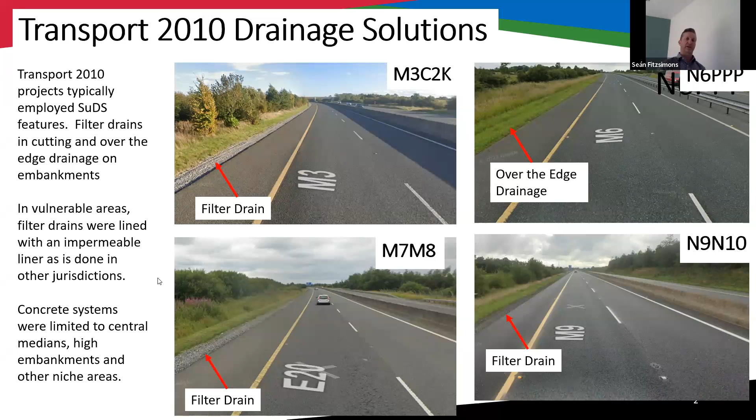Through Transport 2010, we would say that concrete systems were limited to central medians, where you had a concrete barrier, high embankments where you weren't allowed to use over the edge, so over 6 meters you used not be allowed to use over the edge drainage, and some other niche areas. That approach, by hook or by crook, has changed on recent schemes. So on recent schemes there's been a greater emphasis on the need for sealed systems. So recent schemes use concrete systems in areas deemed to be vulnerable.

So the areas deemed to be vulnerable are wetlands, so you don't want to draw down the water. That's quite correct. In wetlands, karst areas and areas with high groundwater tables, neither do you want to activate karst features if you're in a karst landscape, and you don't want to discharge directly to groundwater either. But then equally, in areas of shallow overburden where there's underlying groundwater, you may determine that you require a sealed system. And the result is that sealed systems are being prescribed basically everywhere. You might get up to 80% of areas being deemed to be vulnerable for one reason or another.

And there's no option provided for sealed nature-based drainage solutions within the TII standards. So that's, I suppose, the key message. There's no option for sealed nature-based drainage solutions. So there's no option for a lined filter drain in the TII standards. There's no option for a sealed grass surface water channel in the TII standards. And there's limited facility to use over the edge in areas that are deemed to be vulnerable.

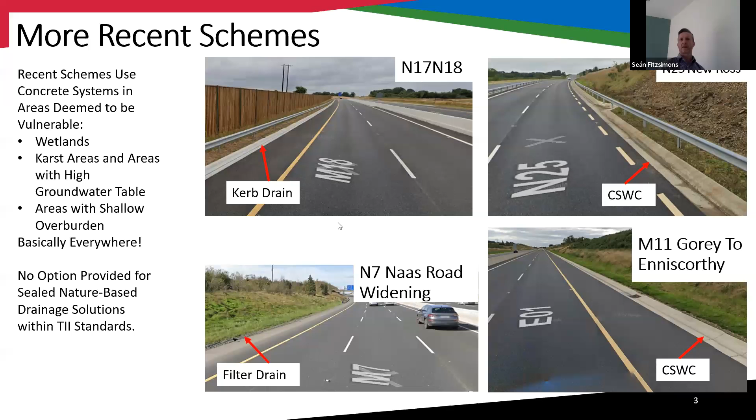And I suppose the other thing that's changed is departures. Typically, we may apply for a departure for a lined filter drain or for a grass surface water channel, and those departures are typically, I would say, refused. So I'm going to tell you a little bit about what we did on the N4 Collooney to Castlebaldwin project, which has broken the mold just slightly, and hopefully shown a way forward.

So the scheme itself was a 14.7 kilometre dual carriageway, associated side roads, one compact grade separated junction, 2 roundabouts, 12 structures, 39 culverts, 3.3 million metres cubed of earthworks, and 327,000 metres squared of pavement, so 32 hectares of pavement, most of which is new pavement. So that would give you the scale of the increase in paved area in Sligo. So obviously a very significant area of new pavement. Some of that, of course, would be associated with local roads, but even those local roads would have been widened.

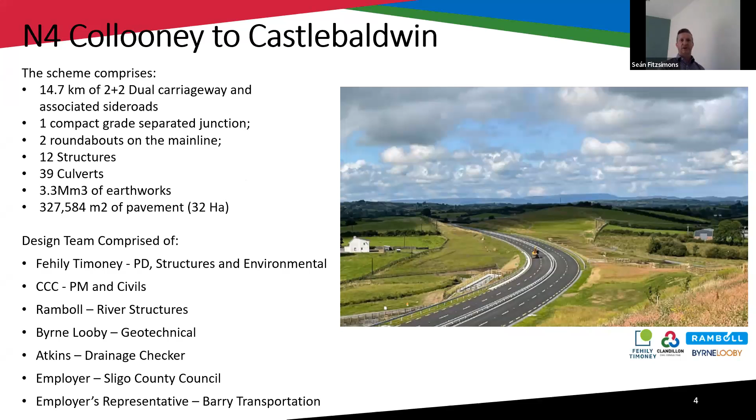The design team comprised Fehily Timoney, ourselves, CCC, Ramboll, Byrne Looby; Atkins were the drainage checker, the employer was Sligo County Council, and the employer's representative was Barry Transportation.

I suppose we came to the project with the approach of trying to maximise SUDS. So for all the environmental benefits that we know about, the water quality, water quantity, carbon footprint, and biodiversity kind of benefits associated with them, we would consider that there's a high risk from a designer's point of view associated with water quantity issues.

One of the issues that we hear back about most, following the development of a scheme of this nature, is that the water quantity or the flooding downstream is increased. It is often a complaint from landowners downstream, and you want to be in a position to address any of those queries when they do come in.

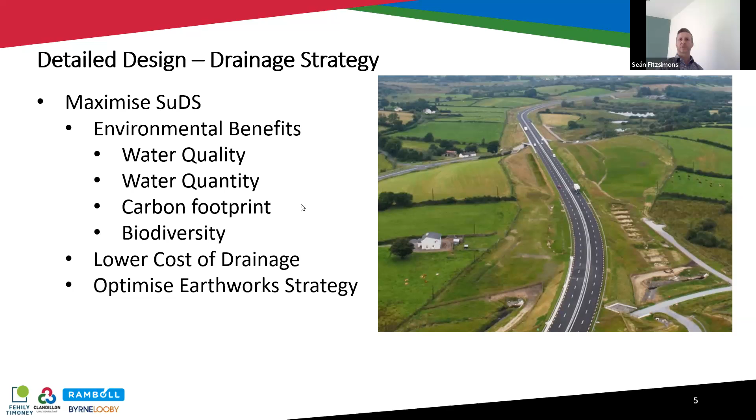It was a design and build, so we were developing the design on behalf of a contractor, and they were obviously very interested in the lower cost of the drainage associated with SUDS. The development of SUDS also facilitated the optimization of the earthwork strategy. Probably not something I'll have time to go into today.

Just go through some of the works requirements that are typical on a large D&B project of this nature. There's a few that are pro-SUDS, let's say. So you need to meet the requirements of the environmental impact statements. They'll typically refer to SUDS, or they'll certainly address runoff volume and runoff rate. And the only real way to address runoff volume is through the use of SUDS and nature-based drainage solutions.

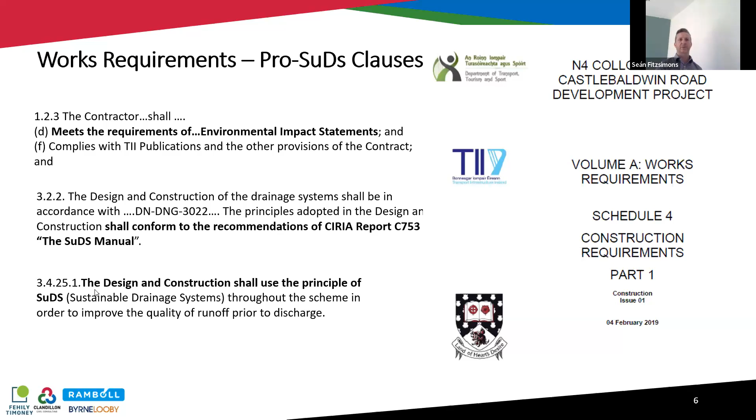The works requirements will say that you should conform to the recommendations of the SUDS manual. That's always in there. And on the N4, we had a particular requirement to use the principle of SUDS. We also had requirements to use sealed drainage systems in locations that cut into bedrock and locations that are within 3 meters of the winter groundwater table. Bear in mind when you're going through any area of peat, the winter groundwater table is at surface level, so that is everywhere where you're crossing peat.

Sealed drainage system where you're in a karstic aquifer, and I suppose you might also say where there's a risk of karstic aquifer. Also particular locations associated with environmental sensitivities, high to extreme aquifer vulnerability. So as I mentioned, we could be talking about 80% of the scheme there.

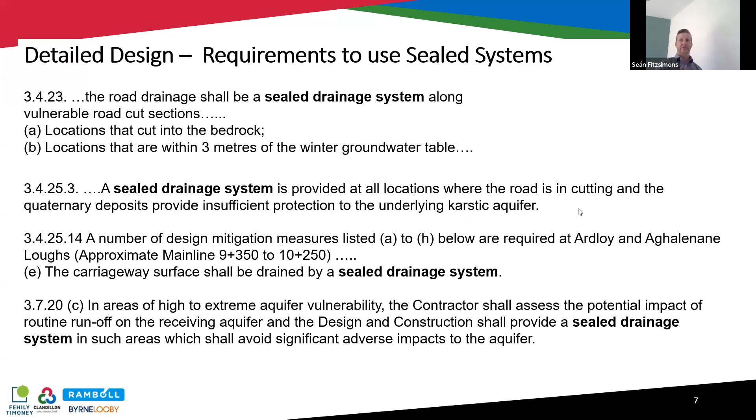There's a definition of what sealed drainage shall be in the works requirements. It should be raised curbs and gullies, combined curb and drainage blocks, linear concrete drainage channels, and lined swales to the approval of the employer's representative. We have seen that taken out of contracts previously, or we've argued for the use of swales to collect runoff at the base of embankments and that hasn't met the approval of the employer's representative. They'll allow you to discharge into a lined swale, but not outfall directly over the edge. People's interpretation of that can vary, is what I'm saying.

Crucially, within the works requirements, we're told that grass surface water channels which are lined shall not be permitted in the works. So that's a serious deterrent for designers, who would otherwise like to use grass surface water channels.

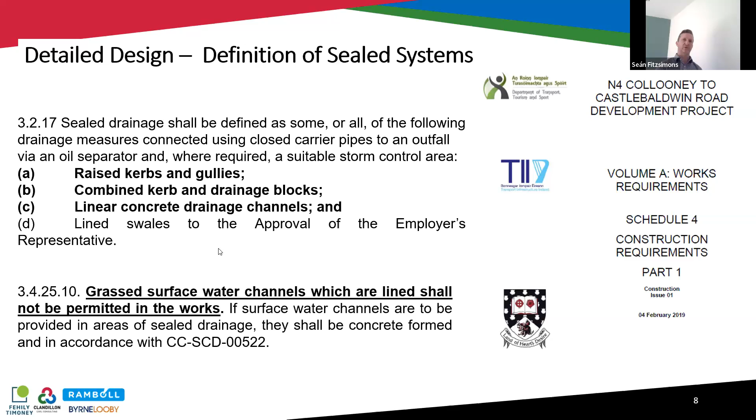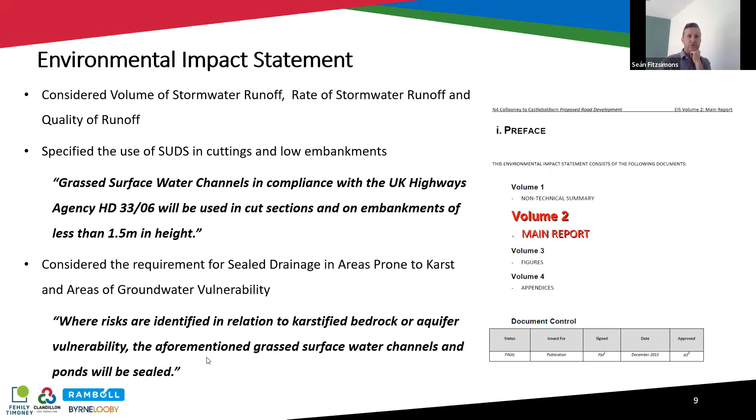What we did do on the N4 is we looked at the EIS in detail. We were obviously very keen to use nature-based drainage solutions, and we found support for that approach within the environmental impact statement, which said that grass surface water channels will be used in cut sections, and that where risks are identified related to karstified bedrock or aquifer vulnerability, the grass surface water channels will be sealed and ponds will be sealed. So we applied for a departure on that basis, noting that the requirements of the EIS are a legal requirement and basically supersede any of our contract requirements, and the departure was ultimately granted.

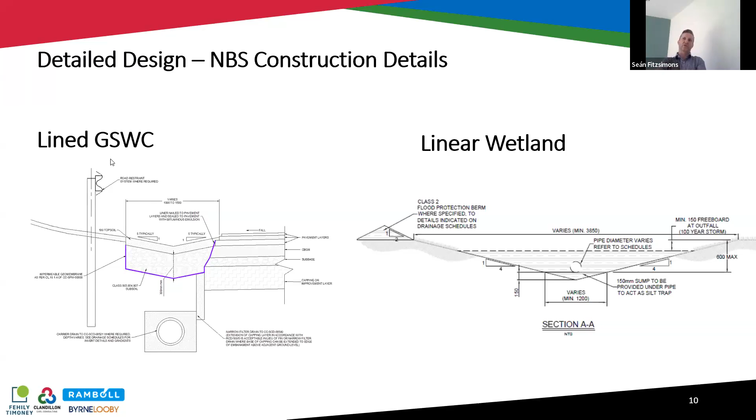There's two nature-based drainage solutions that we relied on for a lot of the drainage along the N4, particularly in the sealed areas. We used lined grass surface water channels, and we used linear wetlands. I'll tell you a little bit about each one. As I mentioned, the lined grass surface water channel was subject to a departure, and we were granted that departure based on the contents of the EIS. Obviously, we also had the contract requirements to use such systems.

Grass surface water channels and lined grass surface water channels had been used on other schemes previously. Anecdotally, we had heard that there had been a problem with their use on other schemes. While the grass surface water channels were lined, the water had come down the edge of the pavement, gotten between the liner and the pavement layers and disappeared. It couldn't be accounted for. And that's part of the reason why they were less popular than we argue they should be.

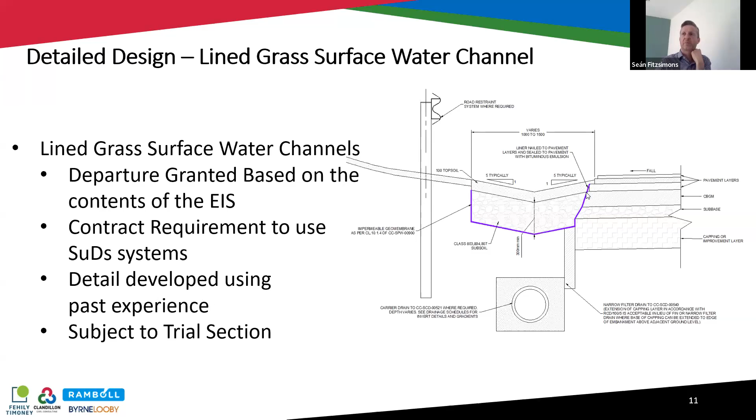So we developed this detail, and I'll go through the detail in a second, and we subjected that to a trial. So we tried a few different ways to ensure that that problem experienced on different projects didn't reoccur here. So basically, again, relatively simple solution, but we nailed the liner to the pavement.

I feel like I'm in a Father Ted episode saying we put the brick on the accelerator, but we

We nailed the liner to the pavement. And we used a bituminous emulsion to tack it to the pavement as well. So ultimately it was a relatively low-fi solution and not particularly complicated. The rest of the detail is as per the typical TII detail. The impermeable geomembrane is as per the Series 900 specification.

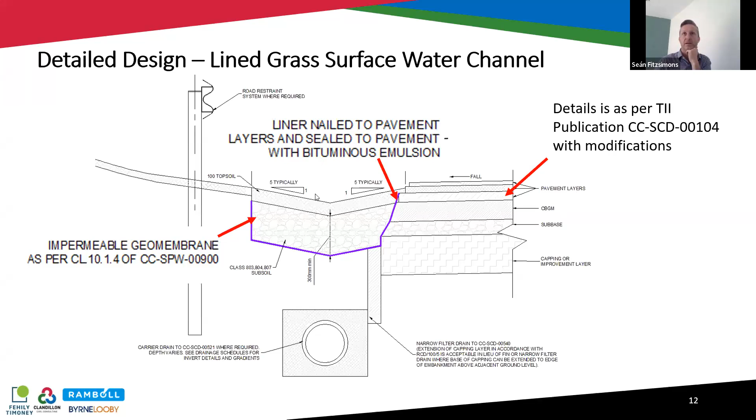And this is it being installed. So pavement installed, trench dug out, liner installed, very neat job. Backfilled with clause 804 material, which is part of the detail as called up in the drainage specification. Some debate as to whether that actually needs to be clause 804 or not, but clause 804 is what's been put in. The liner was then sealed to the pavement.

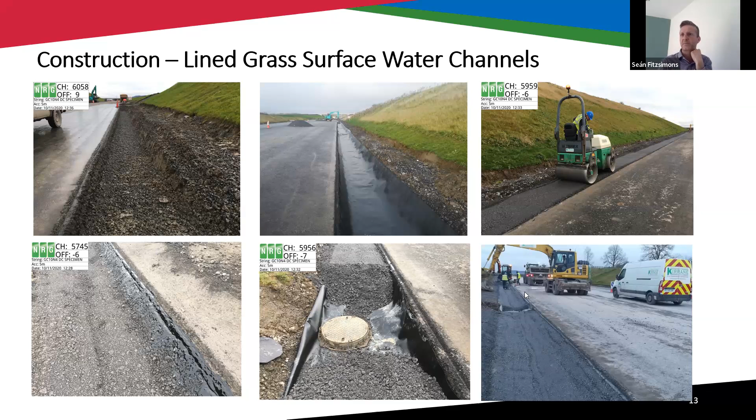Need to get the details around the chambers right as well, just to make sure that the liner is carried through the chamber and that the water has a way of draining into the chamber from the base of the liner. And obviously then the whole thing is shaped and backfilled, and what we ultimately end up with is a grass surface water channel. This is some years later, grass surface water channel adjacent to the road pavement, no curb, I should say.

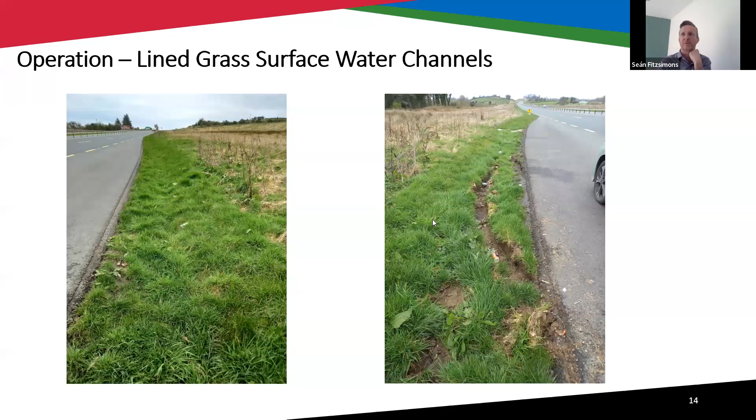We do experience some issues with the grass surface water channel. So as you can see, we're just parked in a lay-by here, and there's a vehicle that's pulled in and crossed over the grass surface water channel. There's potential that some of the liner could come away from the edge of the pavement as well. That is possibly happening there slightly, not entirely clear. But I wouldn't be particularly concerned about the liner.

If that was a concrete surface water channel rather than the grass surface water channel, still risks of some water getting through. And it's about proportional risk, I would say. If it was a concrete surface water channel, you'd have already incurred all the environmental costs associated with the production and laying of that concrete, and the operational costs associated with using concrete. All the missing benefits when you don't use nature-based drainage solutions. So proportionally, I wouldn't be concerned about some elements of the liner getting away. I do think it's worthy of further research.

Similarly here, wouldn't be overly concerned about the rutting. I expect that will fill in over time as the grass surface water channel is maintained. And obviously, with all drainage systems, some maintenance is required.

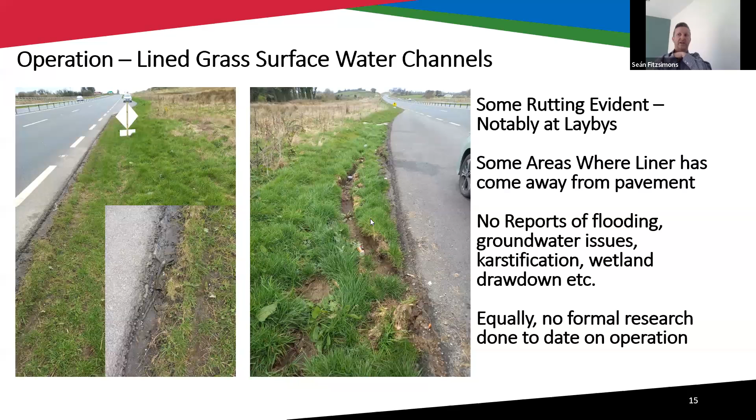Crucially, there's been no reports of flooding, groundwater issues, karstification, wetland drawdown, etc. I suppose they're the things you're trying to avoid when you use sealed systems, and there's been no reports of that. Quite unusual, actually, that I haven't heard any reports of increased water levels downstream. Normally you would get one or two reports of that with these sort of schemes, but there's been none on this scheme. I should say that there's been no formal research done to date on the operation of the grass surface water channels, so we'll come to that later.

This is the detail for the linear wetland. We've got a class 2, but the detail is based around the swale detail within the TII publications. We've made some modifications to that. We incorporated check dams to slow and attenuate the runoff. So they're quite frequent on steep ground, just to make sure that you make the most of the space available for attenuation.

We included a berm where necessary so that we could separate the surface water runoff from the road from flood waters where we're in a flood zone. And where it's not shown in the detail here, but where we were in sealed areas, we carried out testing to ensure the material was sufficiently impermeable. That was quite a crucial point, actually.

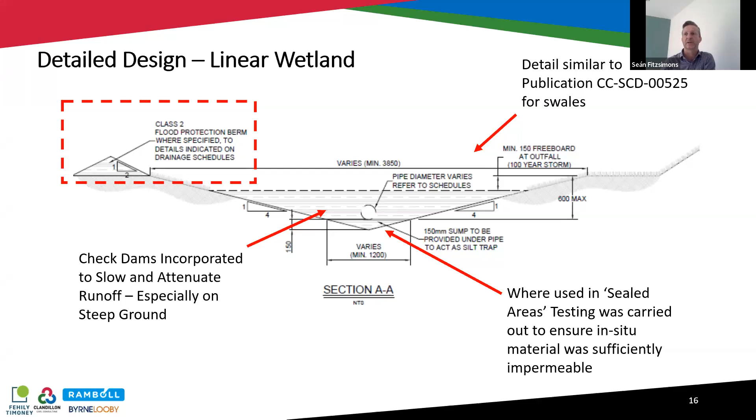There was a suggestion that we'd need to use an impermeable liner underneath the swale, and it would have meant digging out the in situ impermeable peat material underneath the swale in order to put in an impermeable geomembrane. So obviously an artificial product with a lifespan of 20 or 30 years. So we argued that we'd be much better off testing the in situ material, checking that it is impermeable, which we expected to be the case, and using that as a means of saying that the system is impermeable.

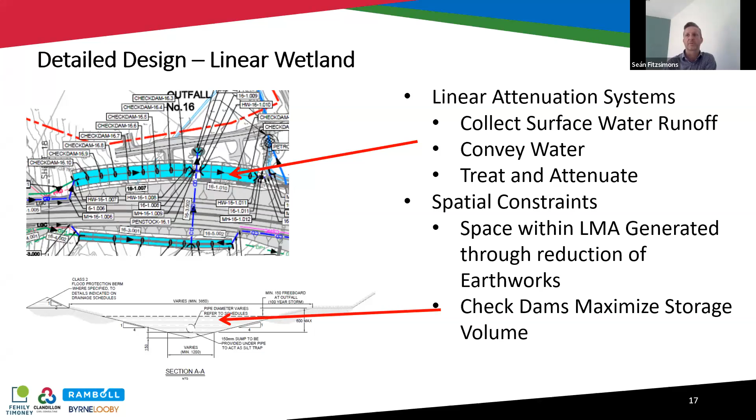So the linear attenuation systems, they collect surface water runoff, they convey the water, and they treat and attenuate. So it's an all-in-one system. We were able to navigate some spatial constraints. So obviously this wasn't there as part of the specimen or the tender design, but we were fortunate enough to be able to make some alignment modifications, reduce embankments, and generate the space for the swales and little linear wetlands where we wanted to put them in. And as I mentioned, we use check dams to maximize the storage.

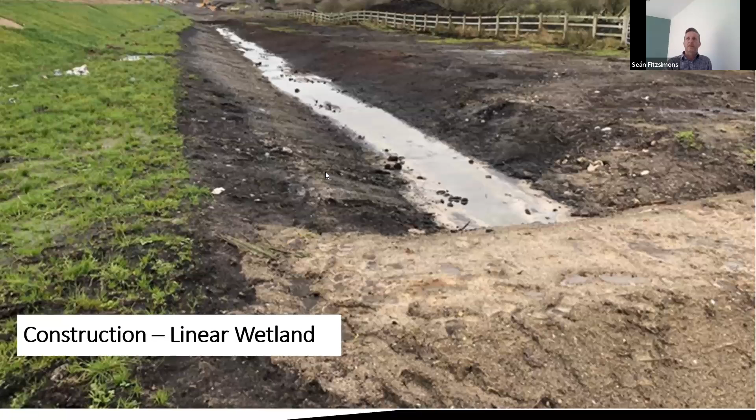So this is a picture of the wetlands being installed. A couple more of those. You can see peaty material there being installed, check dams in, and this is them in operation here. So yeah, not sure there's too much to say there.

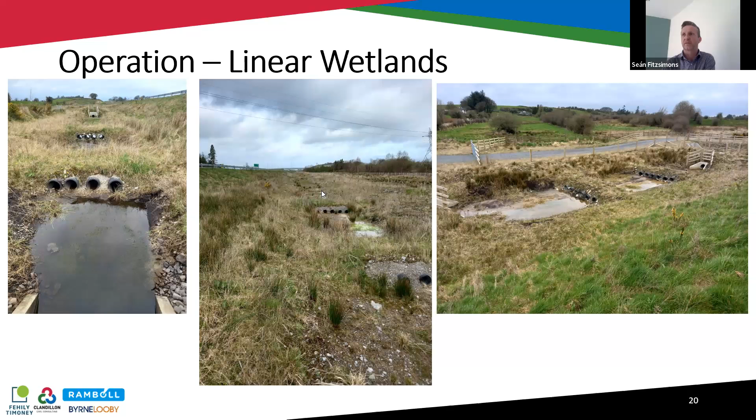I know the contractor was Roadbridge, and unfortunately they went into liquidation shortly after the road opened. These pictures were taken in April. They weren't there to follow up on some of the landscaping measures. Landscaping was completed, but through the establishment period there was nobody looking after it, so there may be some landscaping missing there.

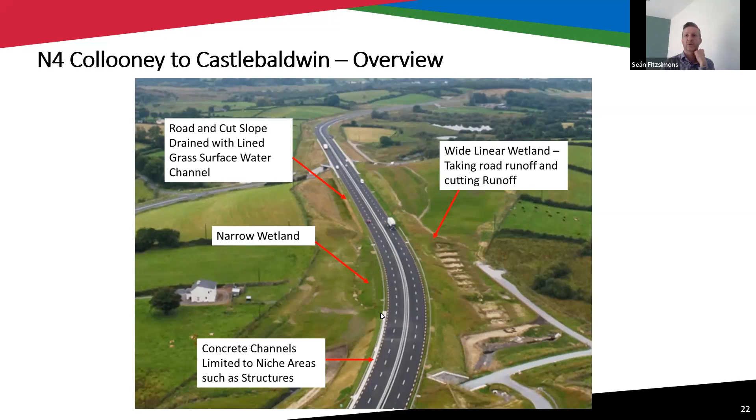We do still have some concrete channels, but they're limited to niche areas such as structures. So what's happening here is the concrete channel is crossing over the structure, and it'll outfall to a linear wetland prior to its ultimate outfall.

There are significant savings on the drainage bill associated with the adoption of the nature-based drainage solutions shown. So we got rid of close to 10 kilometres of pipe drainage and associated chambers on the main line and side roads relative to the tender design. We got rid of all of the pipe drainage on the access tracks, so 7 kilometres of that, and used over the edge drainage on access tracks instead. That resulted in the removal of 11 kilometres of concrete surface water channel and curb slot drains. So it's obviously a very significant scale. When you're dealing with a large highway project like this, the scale is large.

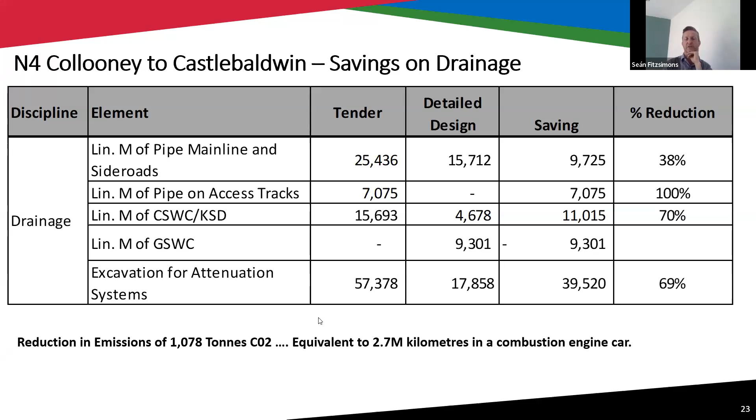And we installed just over 9 kilometres of grass surface water channel in lieu of the concrete surface water channel. The wetlands are a little bit more efficient as well in terms of volumes for attenuation, and we saved 40,000 cubic meters in excavation volume for attenuation systems, which was significant. We also did a carbon audit on the changes to the drainage design and found that we'd saved over 1,000 tons of CO2 through the implementation of these measures. So that's equivalent to about 2.7 million kilometers in a combustion engine car.

So there are some needs for research, we would say, and I have some suggested updates as well to the TII standards or works requirements to facilitate the broader use of nature-based drainage solutions. So the first thing to say is the intention of the March 2015 TII drainage standard updates was to promote SUDS, but the outcome, in conjunction with a change in strategy, and look, this is to some extent anecdotal, but I would say that rather than SUDS measures being increased, they've probably decreased. So that's something that needs to be considered, and probably researched. Like I said, what I'm saying is anecdotal, based on what I've seen around the place. But it'll be interesting to see what the statistics would show.

Is the liner used in the grass surface water channel providing adequate protection. You'd need to test underneath the liner to make sure that no contaminants are getting below the liner. I think that would be a project that's worth doing.

But B, I think it would be interesting to see if the liner is in fact necessary, or if all the contaminants are being trapped in the upper layers of the grass surface water channel. And it would be interesting to test a grass surface water channel that doesn't have a liner, to see if there's any contaminants making it 600 mils down from the surface of the grass surface water channel.

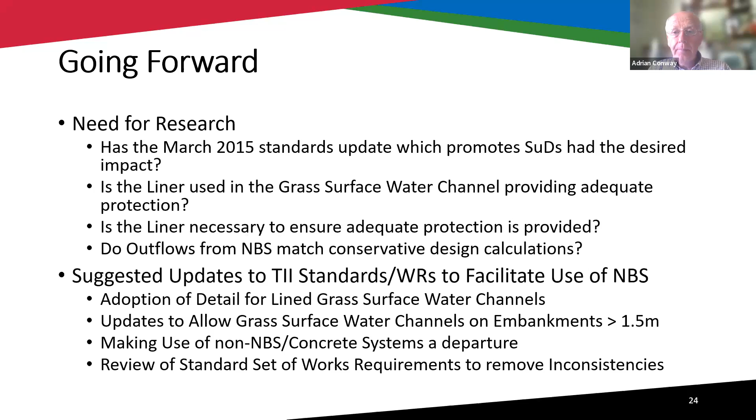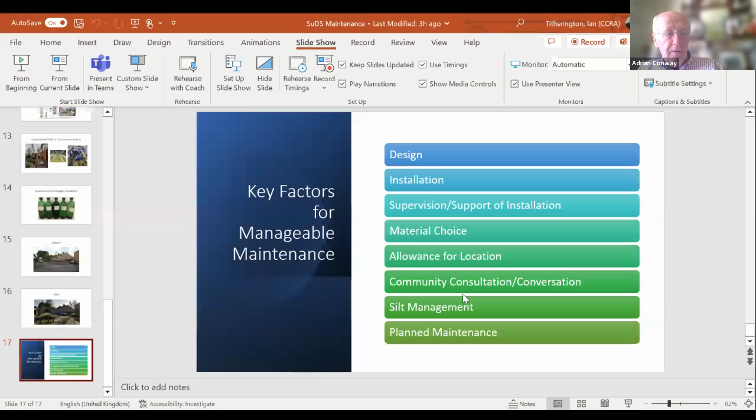Thanks very much, Seán. Our next speaker is Ian Titherington, who will speak on maintenance consideration of the Cardiff experience. After a short spell as a student engineer in the former Neath Borough Council, Ian was a civil engineer in Cardiff Council for over 32 years, specialising in all forms of drainage design, rehabilitation and maintenance, along with other areas of municipal engineering, including waste management. For the last 10 years in that post, he concentrated on drainage elements, new development, specifically SUDs and the development of retrofit SUDs. This included devising, along with Jeremy Jones, now at Atkins, and leading on the Greener Grangetown project, after which he was made UK SUDs champion.

He was a SAB officer with the SUDs Approval Board in Cardiff for the first four years of the Welsh statutory SUDs legislation, helping to deliver statutory SUDs for the capital. He's also currently invited onto advisory groups from CIWEM to the Institution of Civil Engineers, helping to inform on flood risk and all things related to SUDs. His new role is a senior advisor on sustainable drainage for the Welsh government. So without further ado, hand over to you, Ian.

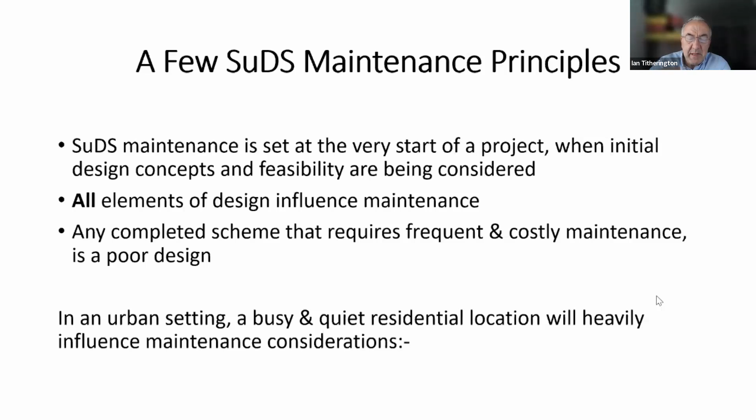If you're in there a lot maintaining, I think we all know it won't be maintained. It has to be designed for infrequent maintenance, easy access. It's very, very important, and that's considered from the very start. In an urban setting, a busy or quiet residential location will heavily influence maintenance considerations. I'll start through the schemes and I'll talk through what I mean.

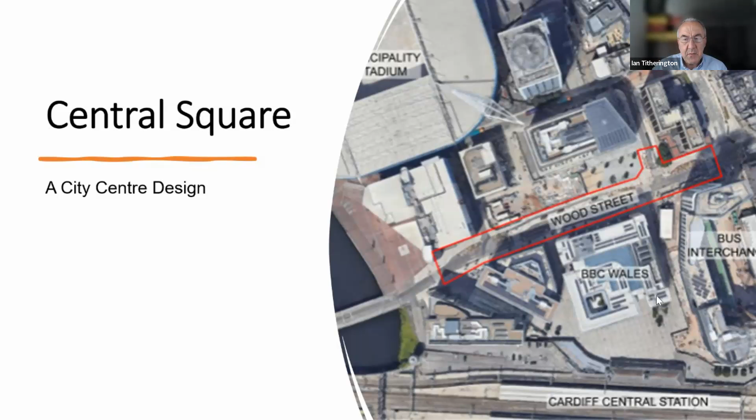The first one is called Central Square in Wood Street in city centre Cardiff. This is about as central as you get in terms of Welsh urban identity. It's near the stadium. It's near the new BBC studios. It's by the river. It's an old part of the city full of services, hugely challenging, next to where the new bus interchange is going to be placed.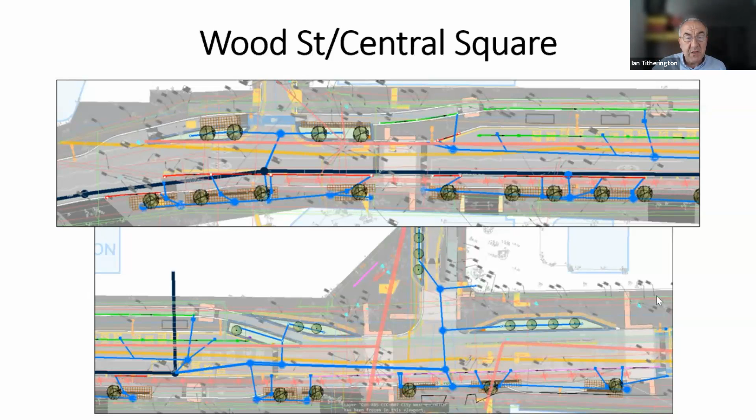You have to design so people don't walk over them. You have to think about maintenance of the vegetation, maintenance of the trees, trip hazards. All these elements are brought in from the very start in terms of maintenance. All the trees that are chosen are low leaf fall, low fruit fall, which can be problematic for cars. So all these things are thought about in terms of maintenance, including the vegetation. One of my colleagues, Isla, will be talking about vegetation later in the presentation.

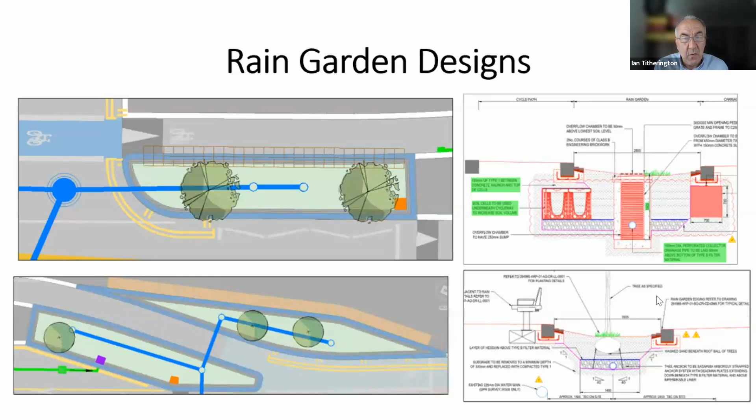Again, a little bit more detail about the rain gardens, how they're designed in terms of allowing for footfall, cycling, as well as traffic. Talking very closely with highways colleagues about curves on the corners in terms of bus access and wheelbases on buses. This scheme actually had to be changed halfway through because they bought a new fleet of buses and they didn't go around the corner very well. So all these things come into account, and access for maintenance.

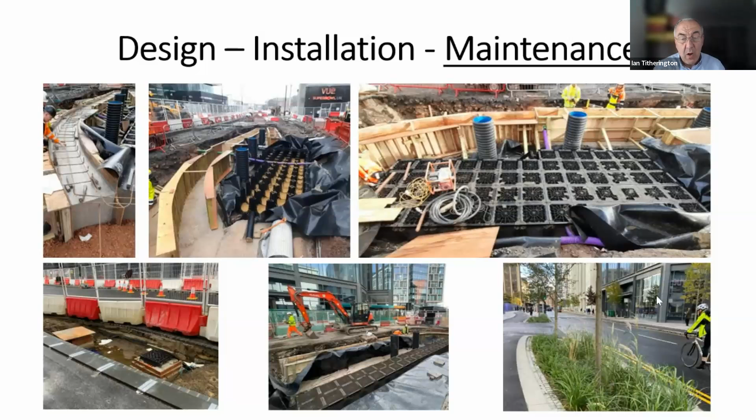That's probably the single biggest challenge. What we've done in this particular site, we've made the areas as wide as possible to deal with the silt, and the vegetation will break down a lot of the silt, but the plan is to probably scrape and remove the silt every 6 months on the edge of the rain garden because the loading is so heavy in a busy highway.

The second example is Greener Grangetown. This was a scheme completed about 5 years ago, a residential scheme, retrofit scheme, a combination partnership between Cardiff Council, Dŵr Cymru Welsh Water and Natural Resources Wales. This is a plan showing the scheme and a few key facts.

12 streets, moving about 42,000 square meters of runoff from the combined network and using grass and gravity to put it in the river. Over 107, I think 108 rain gardens, through 4 new outfalls, including all the elements associated with rain gardens, because we tried to do the street renewal at the same time.

This scheme, in terms of consultation, that was very, very significant. When you're doing retrofit in a residential area where you've got businesses, that conversation rather than consultation is important. And the reason why it's important for maintenance is you get locals involved. If you get locals feeling an element of trust with what you're trying to do, they feel they've been listened to in terms of design, because this is the street that they live in and they work in, it's personal to them. You involve them, they feel a personal link with these things and they look after them.

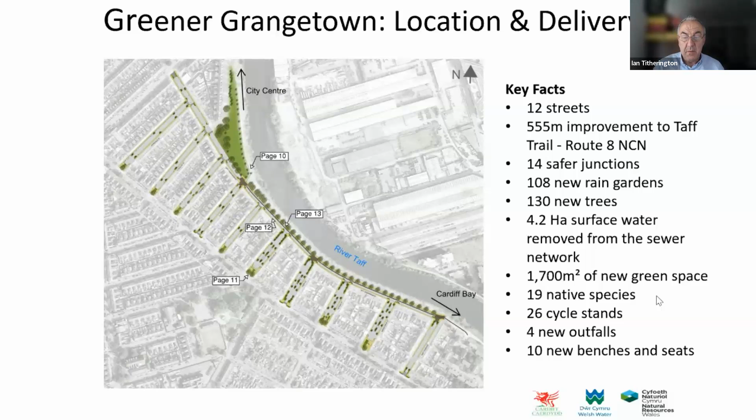That means maintenance. So design challenges: parking, obviously, existing trees. Unlike Plymouth, we try not to chop down the trees we've got. We're trying to add to the canopy we've got in Cardiff, like many cities are doing now. So working around those existing trees with designs is important. Cycle routes, very, very important in terms of access for maintenance. You've got to think about the vehicles in terms of accessing for maintenance, street lighting, signage, access, maintenance.

Maintenance isn't just about the SuDS features, it's maintaining things that are already in the streetscape. You've got to work with highways colleagues on telematics, on lighting, on signage, with your parks colleagues on managing green open space and existing trees. All these elements come into maintenance when you're doing SuDS and retrofit SuDS.

I mentioned earlier about consultation, conversation, community action. This is a classic example of Greener Grangetown, where we had public meetings, we had street surgeries in the open air, we invited families along, we used the schools for conversations with the parents. It's really, really important. I can't overstate, if you're serious about communities taking pride in where they live and looking after what they have, with really, really tight council funding, the consultation enables you to get the locals involved, and they really take pride in what they do.

And this is a typical poster we used. We gave people options in terms of designs. Very, very important again to say, you said, we did. This particular street changed designs on 6 occasions because the locals honed it down to what they wanted. We gave choice about trees, about shrubbery, what they looked like at different times of year in terms of seasonal colouring. We really went down to that level.

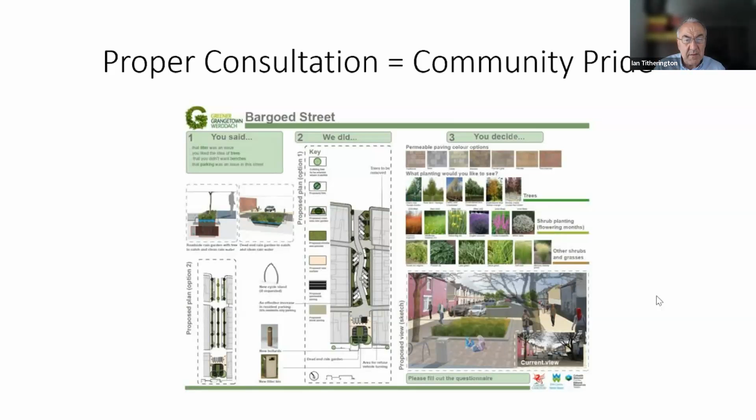They really felt involved. They felt part of the scheme. So they take a lot of pride. Most of the litter picking in these areas is done by locals, not by the council. They volunteer. They do it to take pride in it. They do weeding. They look after things, and that is an essential element of delivering the scheme.

Again, this is an example of it. On certain weekends, we involve local families to do planting. We supply the PPE, and the kids and the parents could get in and dig. And the one on the right is a good example of a local primary school planting a rain garden, and that's what it looked like after 12 months. So these elements are very, very important in terms of consultation, particularly when you retrofit in an existing community.

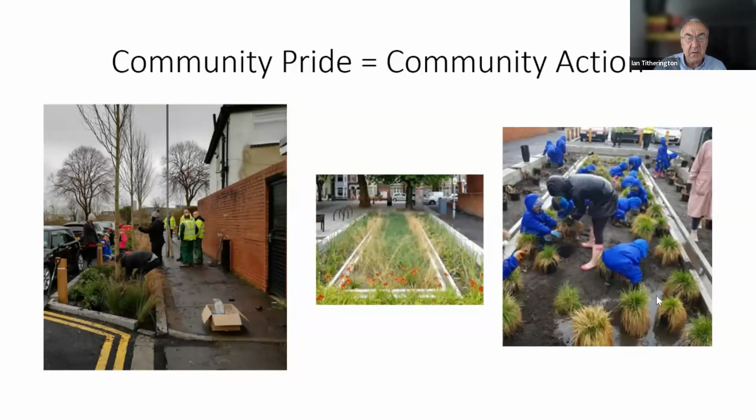But basically, these systems, we went into COVID, they hadn't been touched for 3 years. They work perfectly because they've been designed to work perfectly. The soil is engineered to the right level. The plants are chosen. The trees are chosen. The system works. It's self-cleansing velocity. The maintenance is less because the design is right for the location and the installation is right. Two key factors. I'll finish on this.

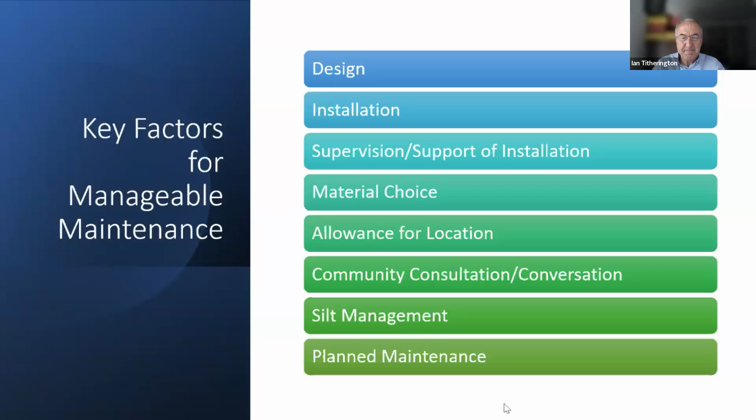Thanks very much, Seán. And our next speaker is Isla Jackson, who will speak on plants and landscaping: what, where, and when. Isla is the Director of Civic Engineers and leads the Scottish Studios. She's passionate about building and the spaces in between the buildings. As a chartered engineer, she aims to create inspirational structures and places that have a positive impact on the environment and enable people to lead happier and healthier lives.

Skills Isla has developed, coupled with the active role engineers are playing in addressing the climate emergency, have found her looking at 5 key principles when designing projects: exploring, not exploiting; building, not destroying; reusing, not just using; listening and learning; and climate resilience. Her work includes leading on all structural, civil and transport engineering projects for the practice in Scotland and Ireland, which includes Block A of the transformative Glasgow Avenue.

A selection of other projects she has been involved in are Glasgow Woodside Making Places, Edinburgh North Grove, Inverness Heritage Trail, and South Dublin District Centres. Isla is also an approved certifier of design for building structures, and a trained principal designer under CDM 2015. So Isla, over to you.

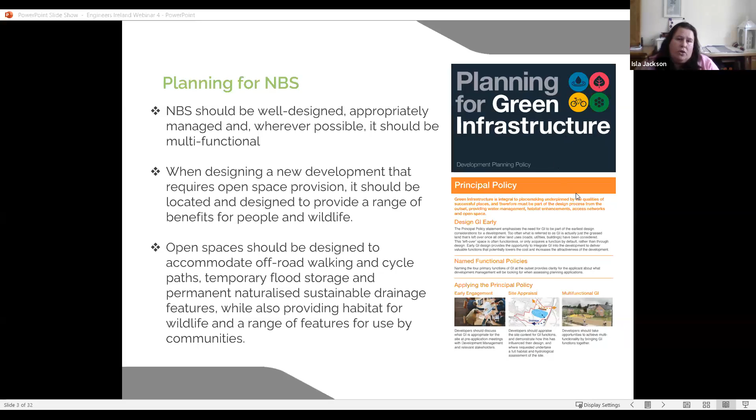Stewardship of NBS, so basically how do we manage it? The success of rain gardens is absolutely critical, and particularly in the first 3 years of their development. If they start looking a bit scrappy and not very attractive, people will start to lose faith that they're doing what they need to do.

So it's really important that we get that maintenance correct, and that people are bought into it, as Ian was saying, whether that's the community, the council, or the developer who's funding that. It almost always will come down to where that funding has come from, and a proper planned approach in the early stages of design is absolutely critical.

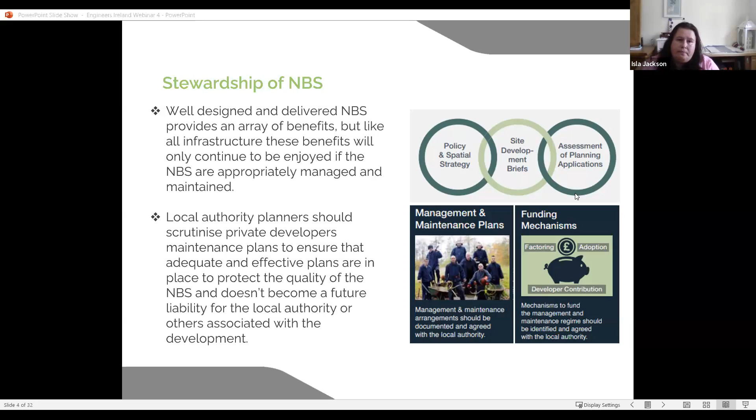Just a few slides on things that are happening in Scotland, which is where I'm based. So Edinburgh's got some quite nice documents in terms of water management, and they've broken it down into regional, citywide policy projects, influential studies and projects. I suppose it's good to note that this is quite a fast-moving science. There are different projects being put on the ground all the time.

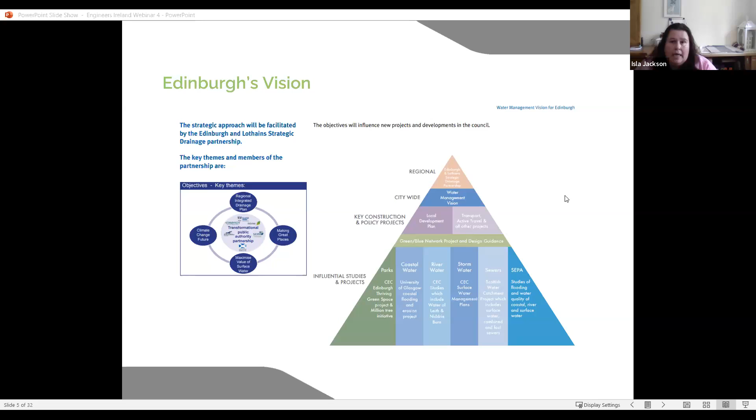It's not particularly frequent at the moment, even in Scotland or Wales or England. It is quite difficult to convince councils to put in nature-based solutions, despite all the policies pointing towards them. So again, it's understanding what the policy is, and mirroring that back to colleagues in councils, to remind them that this is something that needs to be dealt with, and dealt with quickly, given the climate emergency we find ourselves in.

The MGSDP, which I always get a bit mixed up with, is the Metropolitan Glasgow Strategic Drainage Partnership, and they're responsible for looking across the Glasgow region on different types of sustainable drainage or nature-based solutions. So there's different things across each city, and that'll be very similar in Ireland. There's some nice documents that have been produced.

The Irish Green Building Council has quite a nice one that I found online: Biodiversity in the Built Environment. Again, that supports what we're trying to achieve here. A quick Google search will give you some of the backup that you need, and some really interesting facts and figures, which are always useful in the early stages of design, when trying to convince people that this is the right thing to do and we do need to adopt this approach.

Just in terms of a case study, this is the Grey to Green in Sheffield, which was one of the very first really quite major ones that was put in. You can see there that it was on a slight hill. Rain gardens have been installed, and it's been a hugely successful project. The planting is really successful, and it's been widely accepted as being a really successful project.

There have been lessons learned out of Sheffield in terms of the soil makeup, composition, and so on. So again, we're learning as we go, and every project that goes into the ground is an opportunity to learn from that and do better for the next one.

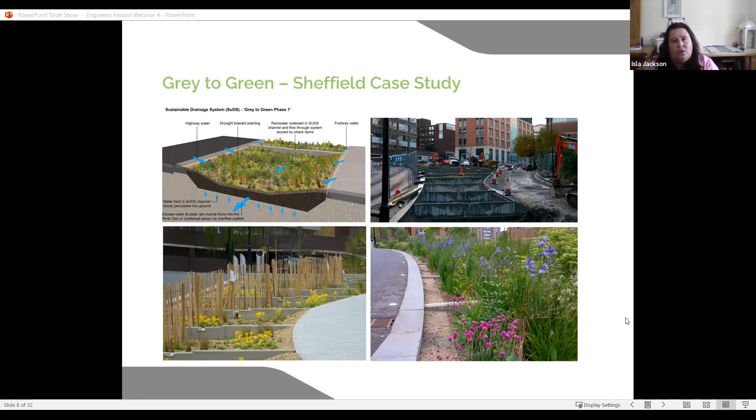So again, it's that sort of education and engagement with people to help them understand what we're trying to do. In terms of the soil that was used in Sheffield, this was quite an early approach, and again, as Ian had said, the British standards sort of promote this green roof type soil.

We've kind of moved away from that, and we're working with academic partners to try and address what is the best type of soil, and that can be quite localised depending on your area. Again, we'll touch on a case study that we're doing in Cork, which is close to the sea as well, which can impact on the selection. But basically, it's to be aggregate stone if we can get that. And what they went with was a 70-20-10 split.

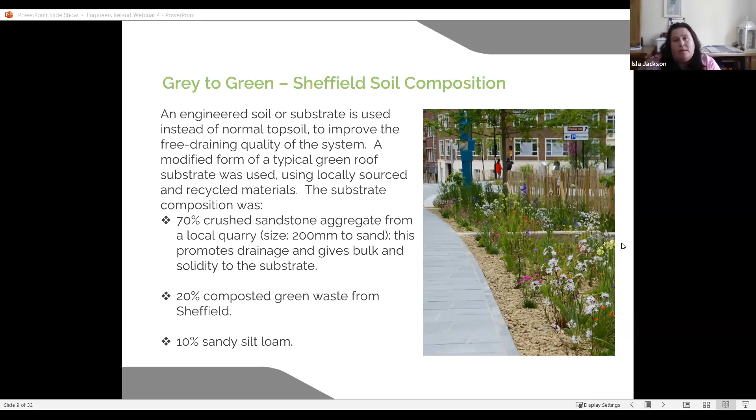And as I say, that is something that we are looking at across the piece. So it's something that you can work, as I say, with different academic partners or through demonstrator or pilot projects to get the right mix to suit your area.

Just in terms of risk-based approach, quite often we can get a bit of pushback in terms of level changes, particularly adjacent to footpaths. And really it's about discussing that with your council colleagues right from the very start. The best ones look like they don't have barriers all over the place, but again it can depend on what the sort of policy is in your area. So early engagement is absolutely critical to get your detailing right, because if these things start coming up towards the end of a project, it can really start to delay things, and it delays things going on site.

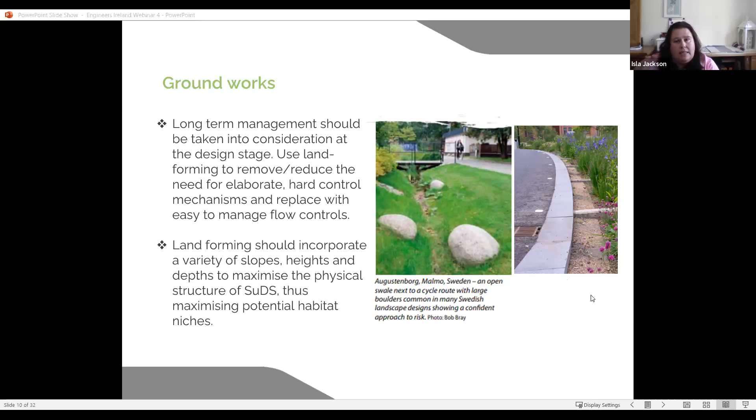In terms of the Sheffield project, they worked with a sort of community organisation, if you will, called Green Estate, which was a really interesting way of doing it. Amey were responsible for the maintenance generally, but they worked with Green Estate in the early days of the Sheffield project, and that worked exceptionally well because they basically worked with the community and they created jobs. They were a local community organisation, and they helped to maintain these rain gardens, as I say, in the early days, which helped them really establish, and it's testament to the successful outcome.

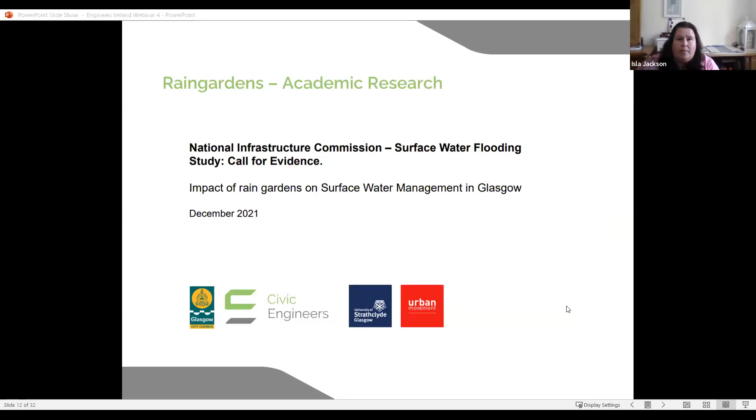We've done some academic research, as I mentioned. This was something that was done with Glasgow City Council and Strathclyde University, based in Glasgow. This was in the early days of the Glasgow Avenues project, a place called Washington Street in Glasgow city centre. Four different test cells were put in with four different soil mixes. Again, we've kind of moved on from where we were originally, but basically what we did was disconnected a gully to take rainwater that would have gone straight into the system, and distributed that across the four different test cells, and then tested the water as it came out at the other end.

It's probably worth noting that these were put in just before the pandemic, and they were not maintained over a course of about two years. So whilst they look a bit scrappy, I think it does show that even with zero maintenance, they can flourish. It just depends on your planting mix.

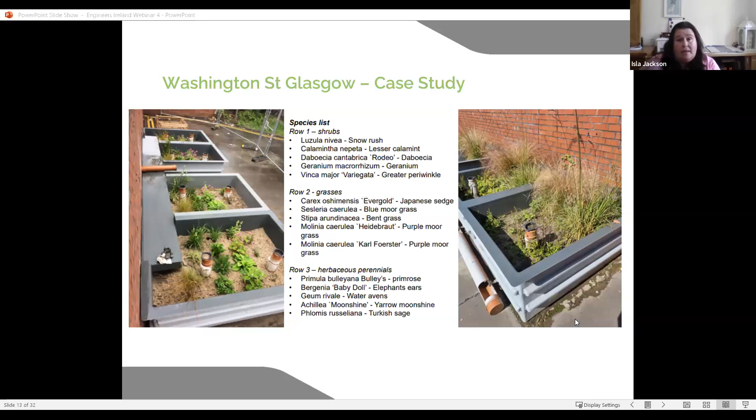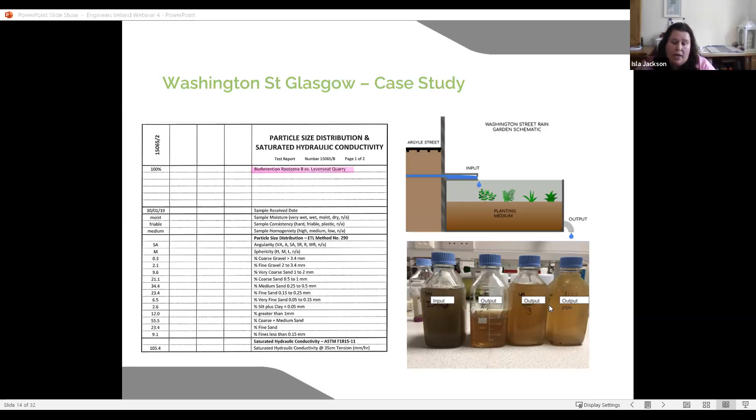So we looked at the four different soil mixes that we put into each of the different containers, and we came up with one that was particularly good. So the water quality that came out of the end of the rain gardens was much improved, particularly in terms of removal of hydrocarbons, etc. We didn't look at microplastics in this particular study, but we will be doing that on the Cork project, and I'll move on to that later on in the presentation.

So ideally what we would do is get the water out of the rain gardens and straight to the Clyde, and get it to a quality that is actually acceptable without it going into the combined system, because Glasgow's combined sewer system is currently over capacity. And as the climate changes, more intense rainfall events will mean that there will be untreated sewer spills into the river more frequently.

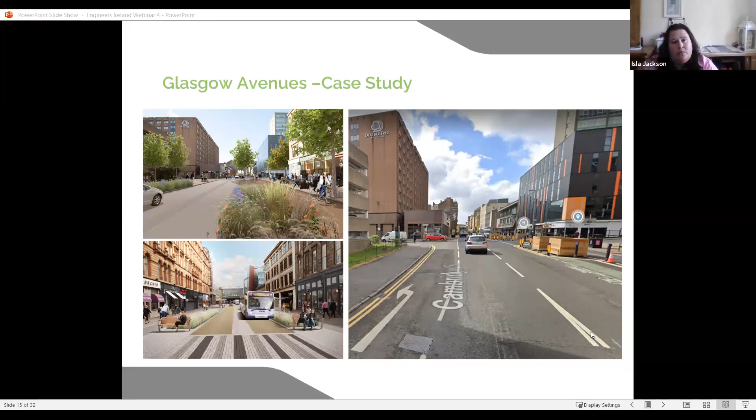And one block is going in front of the new JP Morgan Bank building, which has just been constructed on Argyle Street. And that will give us a real understanding of what the profile of that tunnel looks like. That tunnel is live, so we've obviously got to deal with Network Rail, etc. So that's quite challenging, and it just shows the type of things that we have to deal with when trying to install nature-based solutions in an urban environment.

In terms of species selection for rain gardens, there's actually very few studies that have been undertaken that give us a complete list of plants that you can and should use. And that's because rain gardens obviously will cycle between being potentially completely wet to being completely dry. And as Ian had mentioned, the soil profile is absolutely critical in terms of the attenuation of the water. So the void ratio and what you're actually trying to achieve, the size of the rain gardens based on the amount of water that you're trying to manage coming off the road.

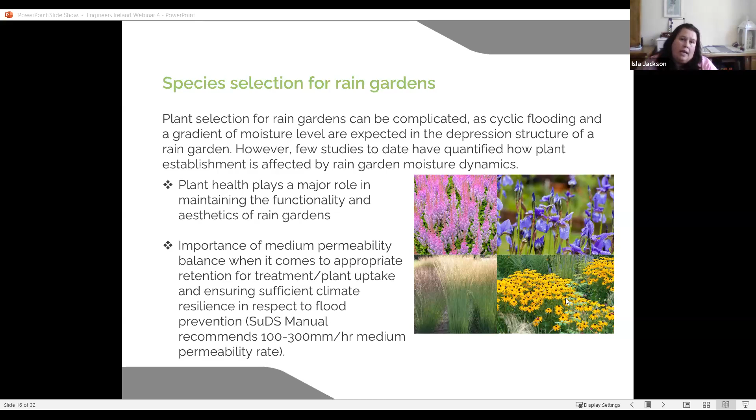So again, there are still studies to be done, and I would encourage people to do pilot schemes and demonstrators to see what works in your area. But there are some planting lists that we can share, which are quite interesting and a good starting point. There was a piece of academic research that was done by Nigel Dunnett, who was heavily involved in the Sheffield project, and that gives an interesting understanding of the different areas within a rain garden.

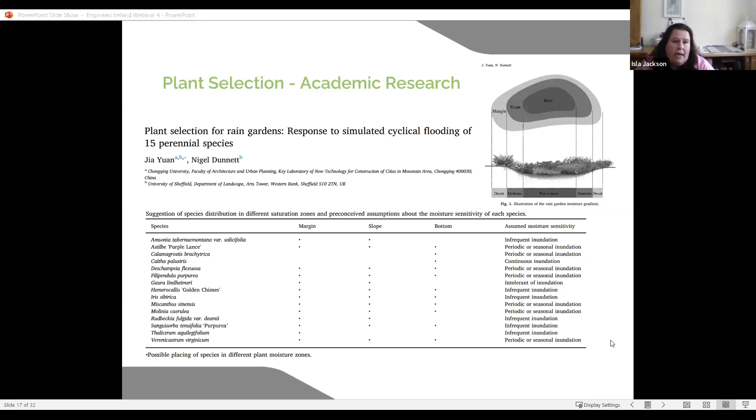So down in the base, it can be quite flooded and wet, whereas it can become quite dry as you get out towards the margins of the rain garden. So again, the profile of the rain gardens that you're looking at can determine the species selection that you have.

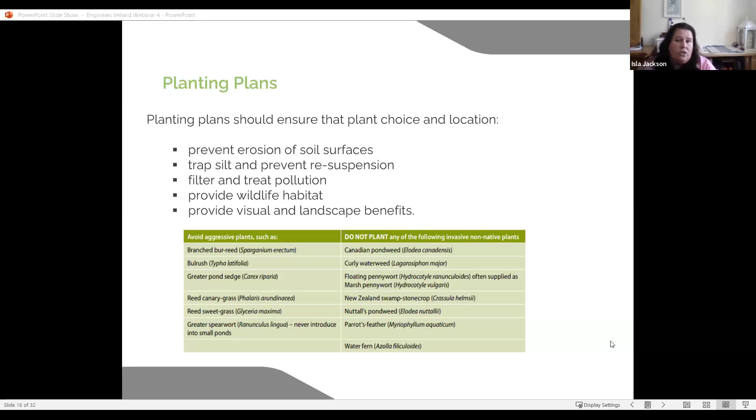So again, selecting a correct planting list is quite critical and should be done at an early stage in the project with the assistance of ecologists and landscape architects based on what the engineered solution is going to be. Just in terms of good practice, I'm not going to read through all of these, but it's all to do with the correct timing of everything, making sure that your density and pattern work for the area that you're looking for.

And a key thing, particularly for the engineers, is how deep you've actually got to play with. In Argyle Street in Glasgow, it's quite shallow because of the tunnel. You can actually go quite a bit deeper if you weren't constrained in that way. Again, that might affect what your planting selection would be.

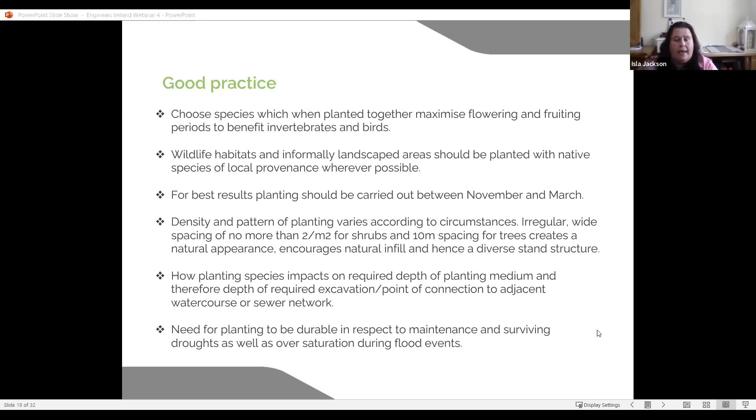So the key thing is to have plants that are durable, that are appropriate for the area that you're putting them in, and will work well across the seasons, so that you don't have 6 months of the year looking pretty unattractive. Whilst it will still function as a drainage solution, it is key that they do also look attractive and they add to the placemaking opportunities that they're in, particularly in city centres.

In terms of street trees, it's really key to get these in, as Ian had said, as large mature trees, and that again could mean that you have to work with your partners to make sure that these are procured early. They may even need to be procured before the tender of the rest of the scheme goes out, because they can take about a year depending on where they're being sourced from. So it is really key to start talking about trees early if they're going into your schemes, and understanding what procurement challenges you may have.

So having large trees, particularly in urban areas, is absolutely key, but they can be expensive and they can take time in terms of a lead-in. So what's been discussed in Glasgow is actually buying these trees and then allowing the contractor to call them off. But again, that needs a bit of thought at the very early stages. Size of trees is also important, particularly if they are going to influence sight lines, in terms of maintenance as well, foliage, etc. And having them in the right location and established early.

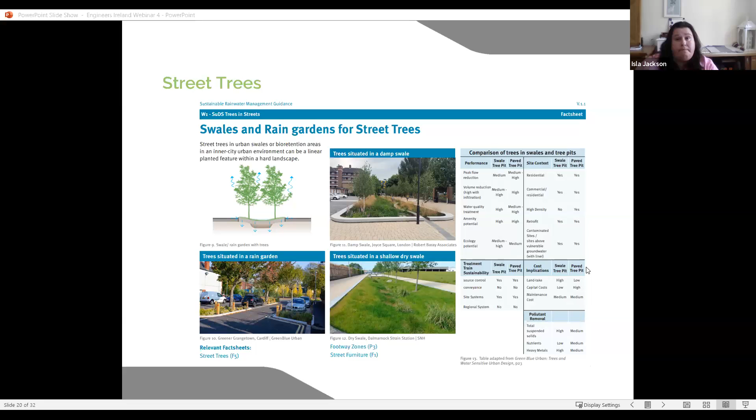You can either go with Stockholm soil, which is something that's used quite frequently in Europe. There are the green blue urban crates that you can use as well. So depending on the size that you've got and whether you can infiltrate directly, that's something to consider when you're looking at trees. I won't go through all of this information, but it gives you an idea of the different tree pits and trenches and the species that you can select. This is an extract from the Edinburgh Guidance, which is available online to anybody, so we can provide that information to you if you need it.

In terms of maintenance for nature-based solutions, we've probably all mentioned that early year 1 and 2 is absolutely critical. There's a bit more of an intensity. Thinking about this early, you can build that into a contract. You can have the contractor actually managing that 1 to 2 year maintenance burden, and then it can be pushed on to just the normal council maintenance from year 3 onwards. So that's a bit of thought process quite early on in a design process of how this is going to be managed, so that the rain gardens have the best possible chance of establishing well.

But you can see from year 3 onwards, it's not a particularly onerous task, 6 monthly, annually. It should really be pretty well established by that point. And I just don't accept that maintenance should be used as a reason not to put these in. You have to maintain road gullies anyway, you have to maintain tarmac. So maintaining a rain garden is really no more onerous than that.

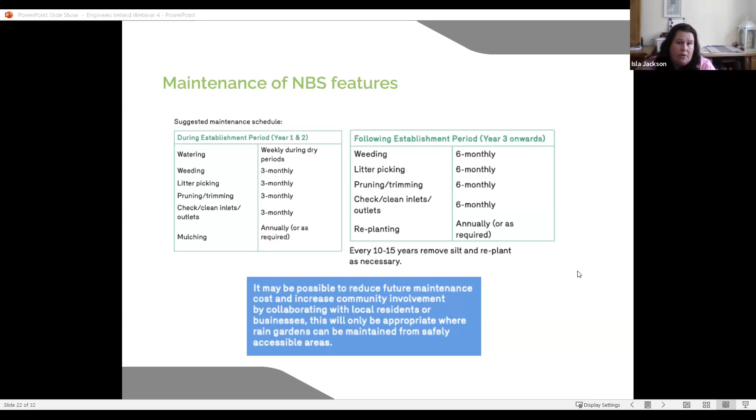So it's all about how councils have their budgets, whether it's the parks department, the roads department, or the drainage department. It's a different thing that we're trying to achieve here, and that will take some time until councils have got to a point where it's not in different silos of different pots of money. So that can be a challenge, but once it's established, it should be relatively straightforward. There are various different types of nature-based solutions and different types of maintenance, and various documents that can give you guidance on that. But it all comes back to that first year 1 and 2 being the critical phase.

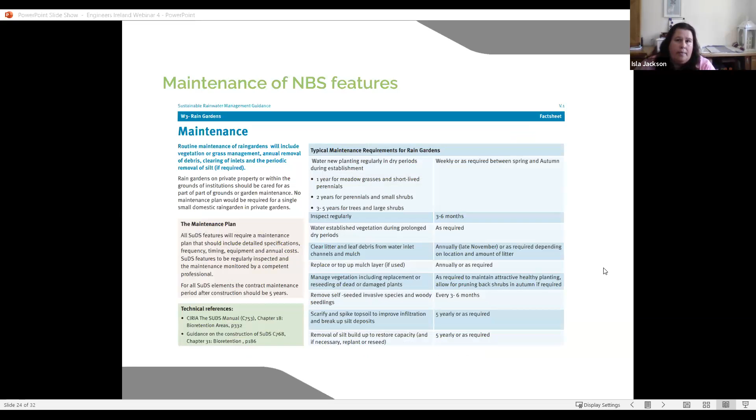And basically it was about artwork, but also we built in some nature-based solutions using precast drainage. It was called Waterworks. It's all about how the water falls off the motorway. It can come off in big sheets when it's been raining heavily, and that's quite a difficult route for people to try and manage. There's also a train station in there which is pretty underused at the moment.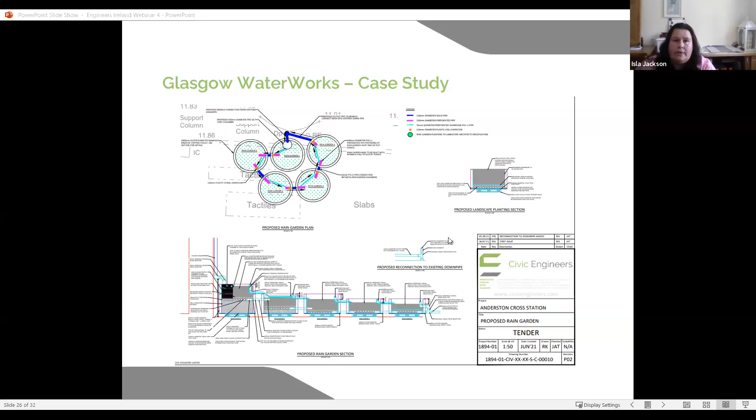how things are developing in terms of the best soil solution. And what will happen out of the back of this is that the bigger project in Westbourne Place, which also has a similar sort of section in terms of the profile, hopefully the information that we'll gain from this will be able to feed into that and make that a much more successful permanent project in the long run.

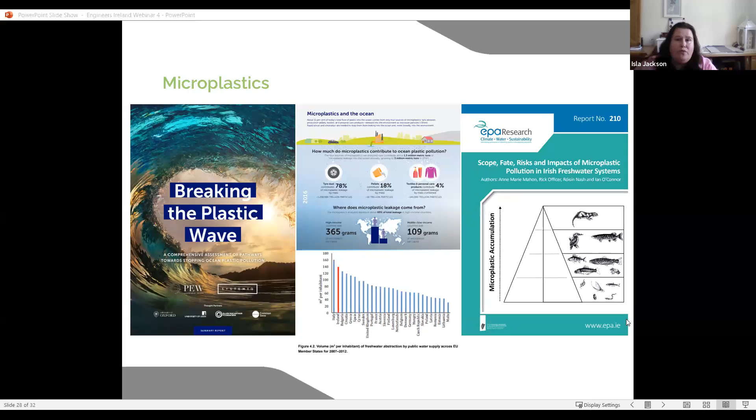So the contractor is actually on the ground at the moment, literally started this week, and hopefully we will start with engagement with the school children and the rest of the community shortly. There's been some really nice boards that have been developed by Cork County Council in terms of engaging the children, because we've found that they can really buy into what we're trying to achieve, and then they'll go home and talk to their parents and try and explain it to them.

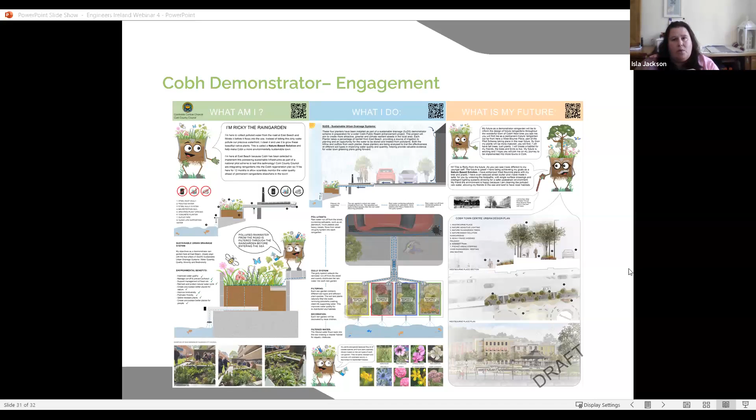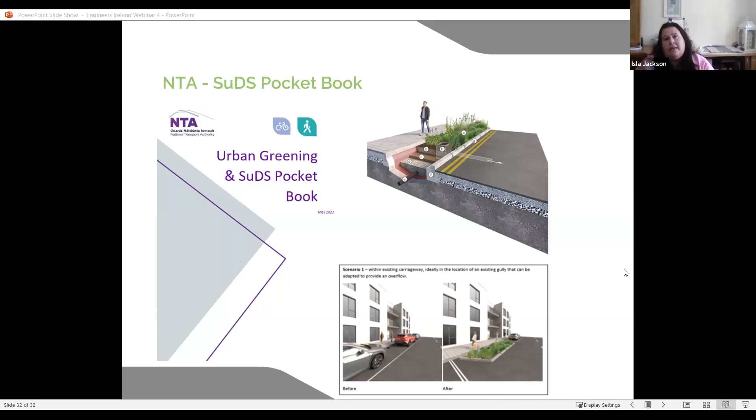for a community. And then just finally, we're working on an NTA SuDS pocketbook at the moment, so I would just encourage you to look out for that. That should be issued in the next month or so, or even earlier. And that tries to give practical advice on installing rain gardens in Ireland. So I hope you found that interesting, and I'm happy to take any questions.

Along with Engineers Ireland, we're also engaging with the professional bodies, because as we know, nature-based solutions isn't just about engineers, it's a multidisciplinary team that's needed. So what we've done is we've worked with ourselves in the department, LAWPRO, Engineers Ireland, and the other bodies of the architects, planners, landscape architects to pull together some conversations to see where we need to go training-wise in both the private and public sector for this. So feel free to contact your professional body and get in touch with them to give your feelings on the ground there, and we'll have those discussions and see where they lead.

In relation to the River Basin Management Plan, because this is where this is all leading and we're looking at water quality, just to give an update, we're currently editing and finalising the text and the programme of measures of the plan, following which there'll be a number of stages which will need to be completed. This includes review by WPAC, an appropriate assessment process, graphic design, Irish language translation, and finally ministerial and government approval of the plan. But it is anticipated that this much-awaited plan will be launched in Q3 of this year.

As a fallout from this plan, we have a number of measures, and Isla talked about one of them. There are 2 particular projects in the nature-based solutions area that I want to talk about. One, they're monitoring pilot projects. One will be based in Dublin City Council and the other will be based in Cork County Council. So they're looking particularly in an Irish context at nature-based solutions, monitoring before and after installation, what will happen, so we're looking forward to the results of these.

Isla talked about the demonstrator, which is the very first stage in the one in Cobh, and I'd welcome everyone to go down and have a look at the demonstrator down on East Beach in Cobh. We're also looking at some further pilot projects in the future which will showcase nature-based solutions, and there'll be more information on that again.